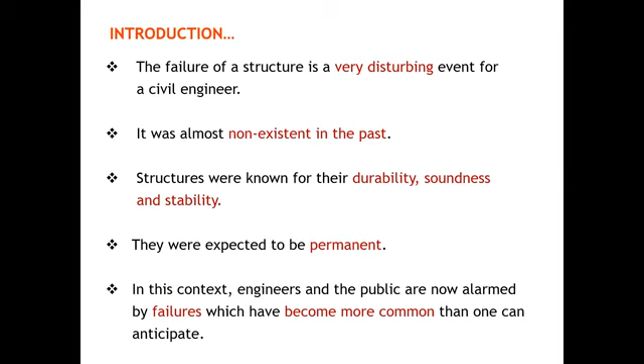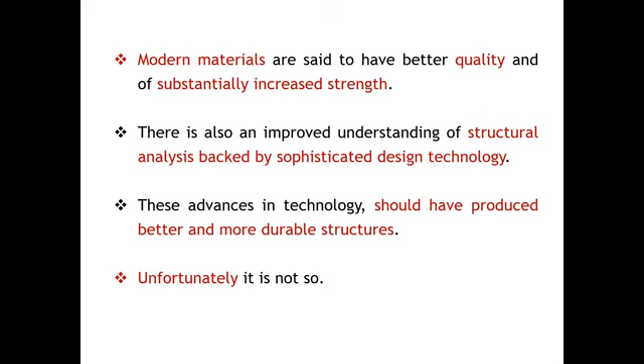But presently, what's happening is that failure of structures is becoming more common. Although we are using very modern materials with high quality standards and sustainability has increased, and we now have sophisticated analysis-backed design technology, despite all this we have issues and problems in structures which are already existing or even during construction time.

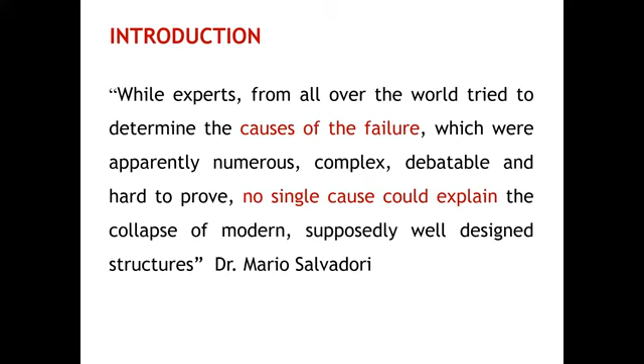So all these requirements make testing of concrete structures mandatory, and we have a number of codes, even our Indian standards, which make it clear that testing has to be practiced while the concreting is being done. All the PMCs are now depending upon these testing values before going ahead with further construction.

So while experts from all over the world try to determine the causes of failure, which are apparently numerous, complex, debatable, there is no single cause that could explain why this is happening.

So at every given point of time, it is better to have testing data with us to decide: are we maintaining the quality, are we addressing the durability, are we going as per the design calculations, the design drawing given by the designer, and things like that.

So there are types of disorders. It could be a functional disorder, or a structural disorder, or a minor disorder, chronic disorder, stabilized one, or progressive one. All that can be decided and addressed if we have data with us, and based on that we'll be able to construct durable structures.

So with this introduction - why we need testing parameters and testing details while construction is on, or the structure is already completed - this will allow us to make the structure more durable, and we'll be able to address what sort of issues are on, how to rectify it, and things like that.

When you get into investigation methods, normally visual observation is most important. Our engineering judgment is going to be very, very valuable, more so than any other testing methodology.

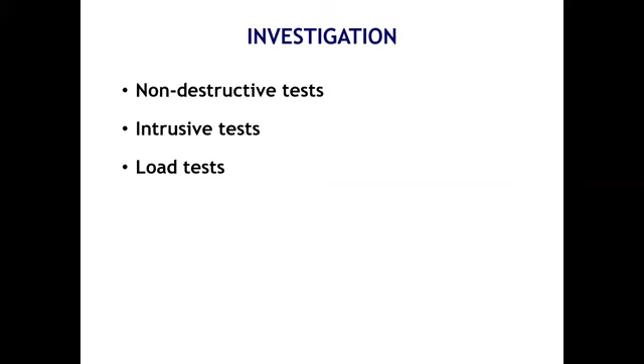When it comes to non-destructive testing, we can use a number of non-destructive testing methods, or go for destructive testing as mentioned earlier. In a few cases, we also go for load tests when we are not able to take a call using these two methods, for example precast structures done with mivan shuttering. The best thing is always to go for a load test to make sure nothing goes wrong.

Normally in India, they commonly adopt non-destructive testing as follows: rebound hammer and penetration technique, ultrasonic pulse velocity, core drilling test to evaluate the equivalent cube compressive strength of the concrete, carbonation test, half-cell potential test, evaluation of chloride and pH through concrete powder sample in terms of durability desired, and Profoscope survey for identifying the cover and the rebar which is already located.

As I said earlier, we don't even get GA drawings, so we don't have a structural drawing. When you want to assess additional load carrying capacity of a member, obviously you need to go for a profometer survey so that you get the approximate details of reinforcement available.

There are a few other tests, like core trepanning, for finding out the loss in pre-stress, but very limited knowledge and usage is available at present. As mentioned by our managing director, SERC is doing this technique, and they are able to predict the loss in pre-stress in the concrete.

The flat jack technique is extensively used for old masonry structures, whether stone masonry or brick masonry, when you want to know the carrying capacity. A flat jack is inserted between two brick or rock masonry mortar joints, and then later inflated, so the stress goes through it, and with a strain gauge you'll be able to get the stress being undergone at that particular point of the structure.

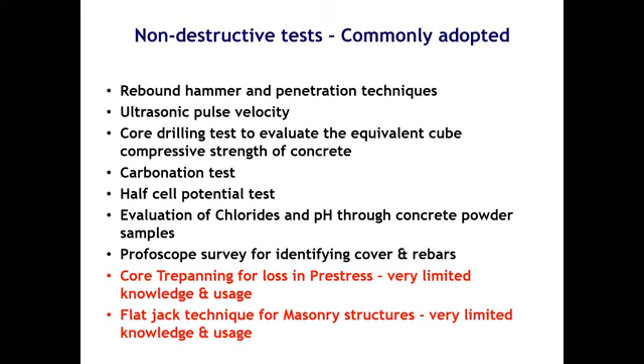Triplet tests are also there, but that's not exactly being extensively used in the industry. The non-popular non-destructive testings are also there.

Thermal methods are basically used in waterproofing lines, where we read the temperature to find out the moisture content. If the temperature is high, there is no moisture movement, so there is no leak or dampness. We can use it for those applications, but otherwise for interpretation in rehabilitation it is not possible.

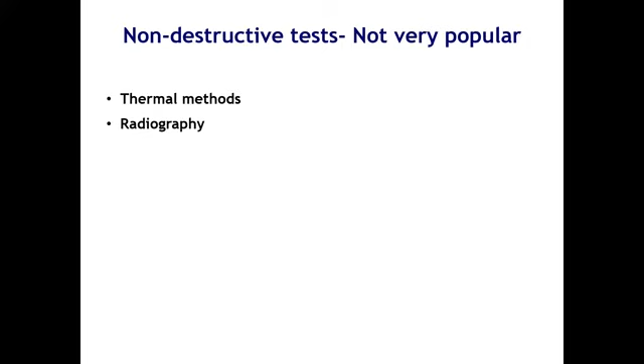Radiography is being used very limitedly; it is not extensively used. Stress wave propagation method and these above methods are not used, simply because there is a lack of physics knowledge on the part of structural engineers, and the limitation to work as a team with a consultant based on physics is going to be very low. Probably in research we'll be able to adopt all this, but on field we have limitations in using these methods.

Now coming to the popular method we've been using, the rebound hammer, which everyone might be using even as a final year student or PG student doing your project. It's a very common handheld device where you measure the hardness of the concrete with a spring-loaded mass inside the hammer. The rebound hammer gives you a rebound number; the higher the number, the harder the concrete surface, which is a qualitative test.

With this test, quantifying the FCK or grade of concrete is not advisable, because for example if concrete has carbonated, it should give a very high rebound number, but that doesn't mean the concrete has a very high FCK value. It may actually have a lower grade but still give a higher rebound number. So it cannot be taken as a quantitative test, only as a qualitative test.

The limitations: you need to have a proper preparation before you do the rebound hammer test, because the smoothness of the surface is very, very important, and it varies with the size and shape of aggregate. For example, I'm going to use a 40 millimeter aggregate.

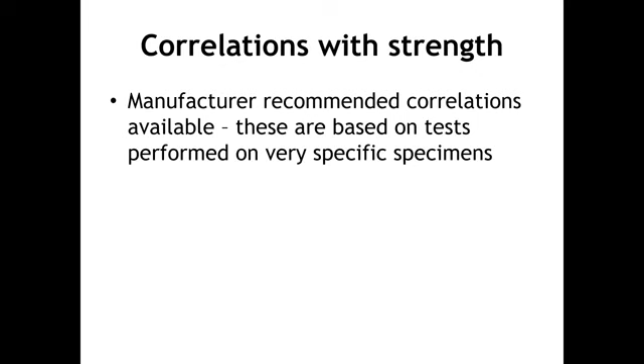As I said earlier, the carbonation of the surface produces a very random number, and that number will not be able to help decide at all. The manufacturer gives a graph where we'll be able to give a recommendation. But the thing is, it is only specific to that particular specimen, because our concrete grade and our concrete making system and type of concrete is totally different from the graph which has been related to that.

So we need to be very, very careful if you want to convert that. If you really want to do it, then you need to cast a number of cubes, do the rebound hammer test, and then take that data, and with that data you can probably predict it. Otherwise, it is not advisable to rely on this graph.

The second one we try to use is ultrasonic pulse velocity. Again, this is also a qualitative test. You can go with different technical equipment like Pundit 7 and Pundit 6. What you're trying to do is that one transducer is going to emit sound waves, and the other is going to receive the sound waves. We know the distance traveled, which is the member thickness, and we can calculate the velocity.

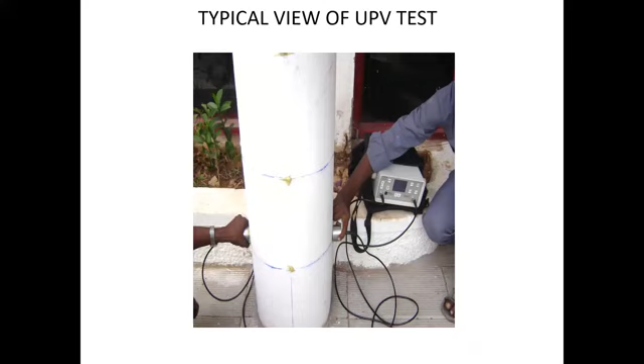Based on the velocity, provisions have been given. It was given in IS 13311 Part 1. Now it has been shifted to 516. The numbers are varying; we'll just look at it.

Now, what is more important here is the transducer frequency you choose matters a lot. Depending upon the path length, you need to go with the natural frequency. Lower the natural frequency, the higher the distance it can travel. So if the thickness of the member is more, you should always opt for a lesser natural frequency transducer, otherwise you may not get a proper reading.

So it is generally used to verify the homogeneity of the concrete, presence of voids, cracks, and loss of integrity. It's qualitative, as I said, and relative concrete conditions can be obtained.

The combination of rebound hammer and UPV helps us in identifying corrosion-prone locations. For example, as was well explained by the earlier speaker, if corrosion is going to take place, obviously expansive forces are introduced, and that pushes the cover concrete.

As it pushes the cover concrete, when I do a rebound hammer test in that particular location, some amount of energy gets dissipated because of the gap between the concrete and the rebar, and you get a lower number. Similarly, when you do the UPV test, as the gap exists between the rebar and the concrete, your UPV value is also going to be very low.

In other areas where the rebars are not there, if you get a better value, and where rebar is present you get a lower value along with a very low rebound number, we can infer that corrosion has already initiated.

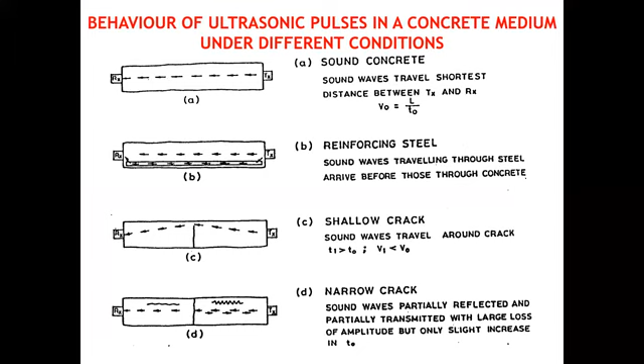If the concrete is sound, waves travel straight forward and we get the velocity. If you've got heavily congested rebar in the concrete, sound waves travel through the rebar and you get a much higher velocity, so you need to be very cautious about whether to take these values as representing the concrete velocity.

So you need to use a profoscope and make sure you are avoiding the maximum rebar location, so that you don't get a value which does not actually represent the quality of the concrete.

If it is a shallow crack, the waves will always travel through an alternative path, which takes a longer time, and then the velocity will get reduced.

If a crack is wide, obviously the whole signal will be reflected, and you will not get any signal at all. In the narrow crack case, you get an unstable reading, but here you will not get any readings at all.

If you've got voids and micro cracks, sound waves may not travel across them, and then you will get an unstable reading.

But what happens is, if the concrete is completely saturated with water, even though it has voids and micro cracks, you will still get a higher value because water is a conductive medium, and it may not be the right value at all.

So you need to check maybe once in the morning and once in the afternoon, and then compare the two. If the values are not varying, then you can take this as a valid reading.

The code gives you the spacing between the points. 300 millimeters center to center is a grid point we are supposed to have, and then take the reading.

If we normally use acoustic coupling, on that side we normally go with grease. Of course, the manufacturer also gives acoustic coupling gel, which is very expensive. Normally you can go with the grease.

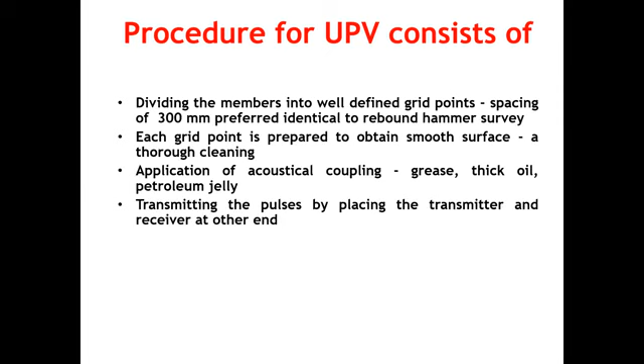The whole purpose is we don't want any gap or void between the concrete surface and the transducer, because however much grinding we do, the flatness will not be exact. So we need to use some gel, which could be a petroleum jelly, so that we make the contact proper, transmit the pulse, and the other probe receives it so we can calculate the velocity.

Once you calculate the velocity, it can be inferred using IS 13311 earlier. If it is above 4.5, the concrete quality is excellent, and between 3.5 to 4.5, it is good, and so on.

But now the code has been revised, and the earlier version did not talk about the grade of concrete. The present guideline says if your concrete is above M25 grade, and the velocity is more than 4.5 kilometers, then it is excellent. 3.75 to 4.5 is good. Below 3.75 is doubtful.

If you look at the earlier guideline, below 3 is only doubtful. If it is between 3 to 3.5, it is medium, and 3.5 to 4 was good.

Core test is another method where we get the exact FCK value of the concrete. For example, if you wanted to add one more floor, or upgrade the structure from seismic zone 2 to zone 3, the designer needs to know the reinforcement detailing and also the core, so we need the FCK value. For that, the best method is the core.

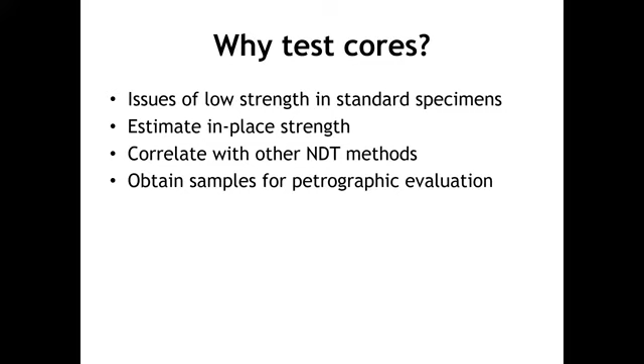Sometimes you use this for doing petrographic evaluation, because now you get aggregates which are more reactive. We need to be very careful, otherwise we'll have alkali aggregate reaction issues. It also helps estimate the general and internal condition of the concrete, and get information about the carbonation depth, density, and so on. For those, we use this method.

Now coming to number of tests, how many cores we need to extract depends upon the objective. Suppose you wanted to quantify the strength of the concrete, or there are cube issues, then you need at least a minimum of 3 cores so you can take the average and derive what is going to be the FCK value of the concrete.

If it's for in-place strength, take as many as possible, depending on which members we are going to address, and based on that we decide the number. This is the system followed.

Normally the core is extracted with a diamond fitted wheel, and the minimum diameter of the core should be 94 millimeter, or 2 times the maximum size of the aggregate. But in the field, 69 mm is what's used by us and many other consulting companies. The reason is the rebar spacing normally comes to about 75 millimeter maximum, so with a 94 millimeter core we won't be able to avoid cutting the reinforcement. So we go for 69 millimeter.

The L by D ratio of 2 is preferred; it can be between 1.9 to 2.1. In case it's not possible, for example if the slab thickness itself is only 100 or 120 millimeter and I'm using a 69 millimeter diameter core, I won't get the L by D ratio of 2, but you can use the correction factor given in IS 516. As per IS 516 or ASTM C39, L by D should be 2, and cores with embedded reinforcement should be avoided as much as possible.

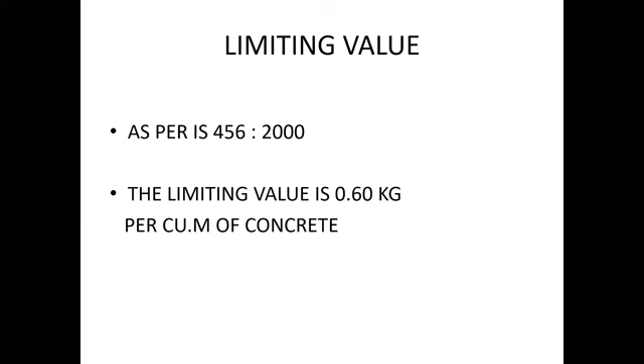As per IS 456, up to 0.6 kg per cubic meter is allowable, not an issue. That was also well explained by Professor - why some amount of initial chloride ion value need not be alarming to the concrete. When it goes beyond that, then you have issues with the chloride.

If your pH value is greater than 11.5 and you've got very low chloride content, then your structure is not expected to corrode fast. If the pH value is very high, but your chloride content is also very high, then obviously the structure is expected to corrode. Low pH value, which is acidic in nature, with low chloride content - still, although the chloride content is low, your pH value is also equally low, so obviously the concrete will corrode. And low pH with high chloride, nevertheless, we don't have to say anything - obviously the structure is bound to corrode.

The other test we use is the profometer survey. Normally we use it for locating the rebar. Sometimes where you want to take a core for pipelines or AC lines and things like that, we use it to avoid cutting the rebar, and to find out the diameter of the rebar we use this. And also to find what is the depth of the cover at that particular region, we need to use this cover meter survey. So this is how it looks like.

There are two types: one is a profometer where you get a scanner separately, and the other is a profoscope where the profometer and scanner come together, where you will be able to find out the diameter of the bar, which works on a non-destructive pulse induction principle. It is insensitive to external interferences, and is used to check the cover thickness, rebar position, and diameter of the bar. In this particular case, you find 75, which shows the cover thickness of the particular member.

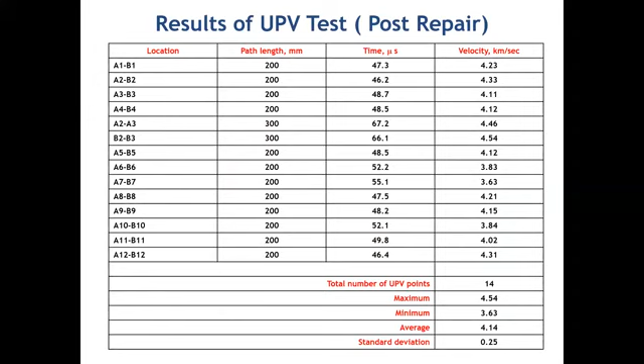So the repair was done in 2005, and SCRC completed the post-repair investigations in 2006. The investigation demonstrated that the repair methodology as well as execution adopted was perfect. The UPV values are very good, and all 3 units were put into use in the year 2006. Until today, it is functioning absolutely fine, no problem. This is a rehabilitated pedestal, and these are all the UPV values that have been done. If you look at it, the maximum was 4.54, and average was 4.14, and then it was certified for usage, and it went on well.

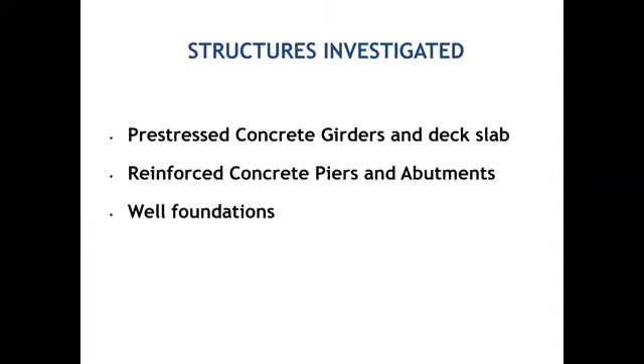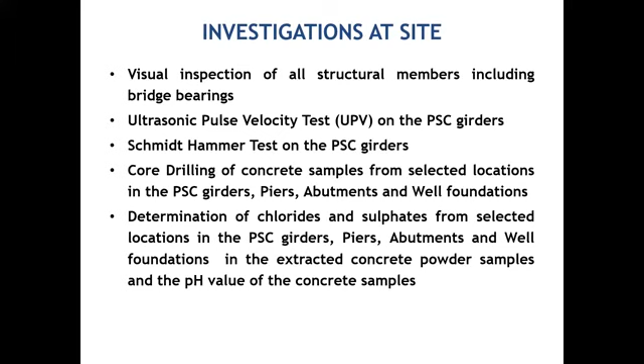So condition assessment of the bridge - this bridge was washed off during a flood, and then they had other related issues. It's a pre-stressed concrete girder and deck slab, with reinforced concrete piers and abutment. A well foundation was adopted in that. Visual inspection was done, including the bridge bearing, ultrasonic pulse velocity, rebound hammer, core extraction, and determination of chlorides and sulfates.

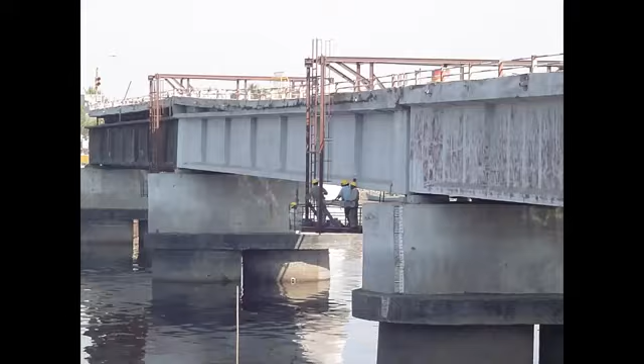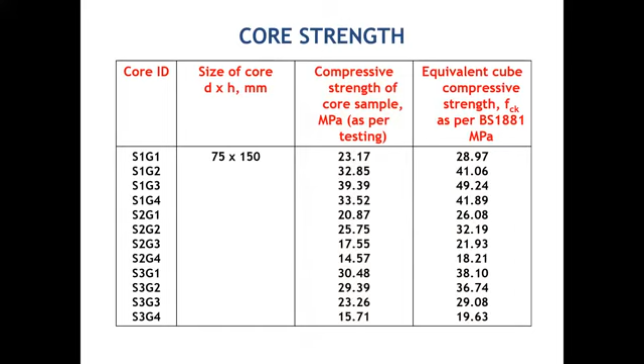Since it is a pre-stressed concrete girder, regular core extraction cannot be done. So a special system was adopted by SCRC to find out the loss in pre-stress. This is how the testing was done. Core trepanning method was adopted by SCRC to find out the loss in pre-stress, because we cannot go for straightforward core extraction there. Based on that, they analyzed the loss in pre-stress.

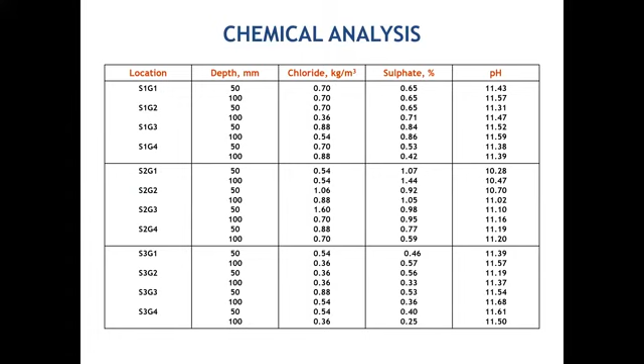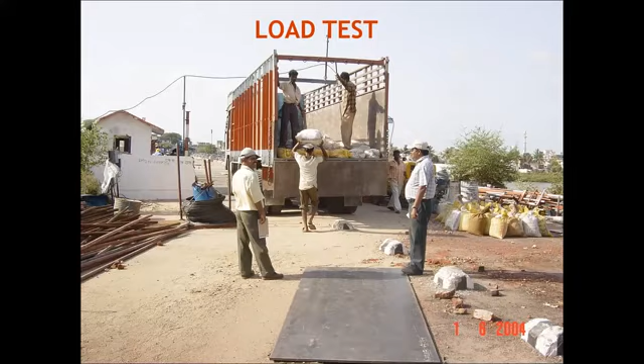Chemical analysis was done for chloride and sulfate. Chloride was found a little higher than the threshold limits in a few locations, while other locations were well within the limit. So finally, since it is a pre-stressed bridge, external pre-stressing was adopted as the rehabilitation methodology. Later, load testing was done, and it was certified for putting into use.

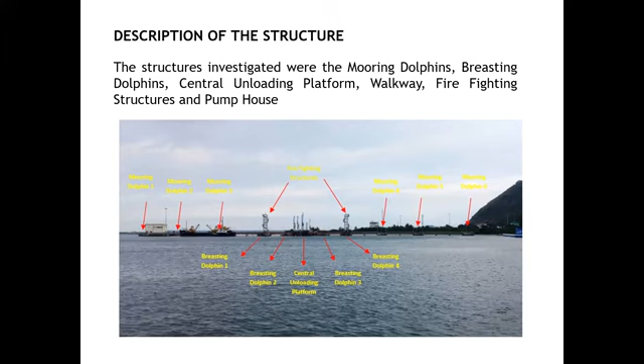The other case study is a condition assessment of concrete and RC structural elements of an LPG berth and outer harbor port trust. In a harbor you get a number of structures: mooring dolphins, firefighting structures, central unloading platforms, breasting structures, and a number of other structures. But if you look at all these structures, almost all of them will have a similar issue, where corrosion is going to be the major issue.

A number of times we come across the issue of how many structures have to be assessed. Suppose I have a particular structure, how many points do I need to do rebound hammer testing, how many cores do I need to take - these sort of things. For example, in a marine structure, core testing is not that important, because we know durability is going to be an issue. So we always opt more for half-cell potential, UPV, and then chloride and pH value, which are going to predominantly decide your repair methodology.

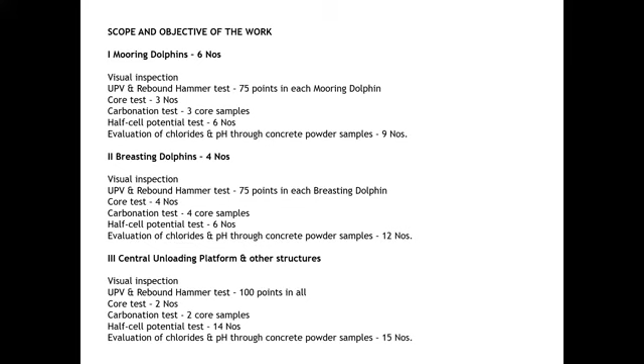So for the different structures, you decide the numbers, and then you go for visual observation, checking whether spalling has already taken place or only cracking has occurred.

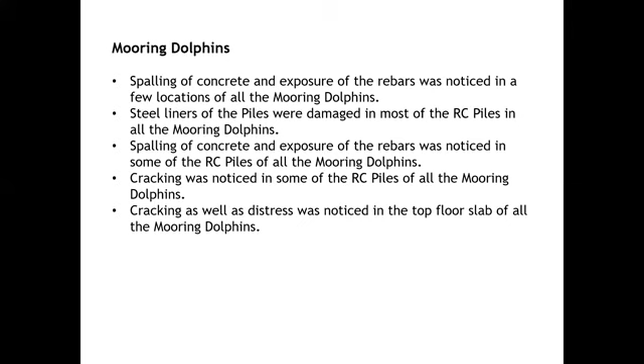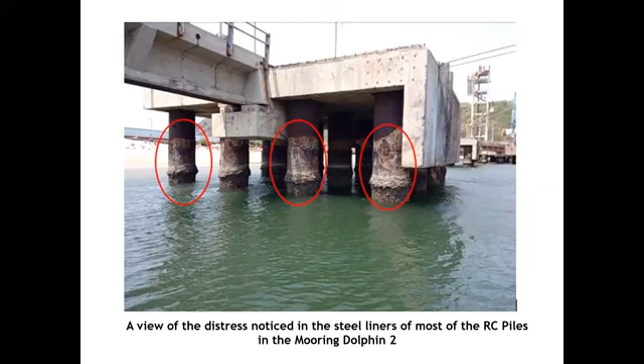Suppose you have a steel liner - what was its original thickness, and what is the thickness now? Should we maintain the same steel liner, or can we remove it completely and redo it? For example, now the stirrups are visible - this is the condition of the steel liner. You can find the steel liner is completely gone, and even the stirrups are visible from outside. And you will get cracks on the top deck of the slab.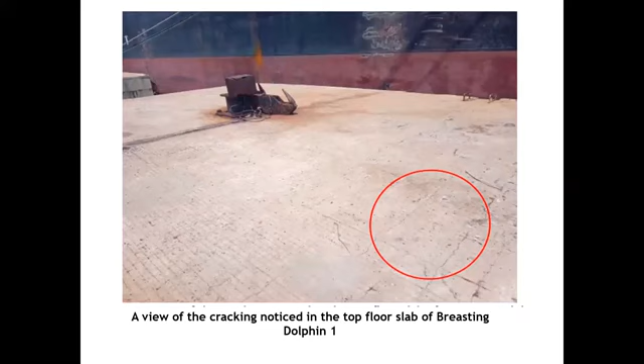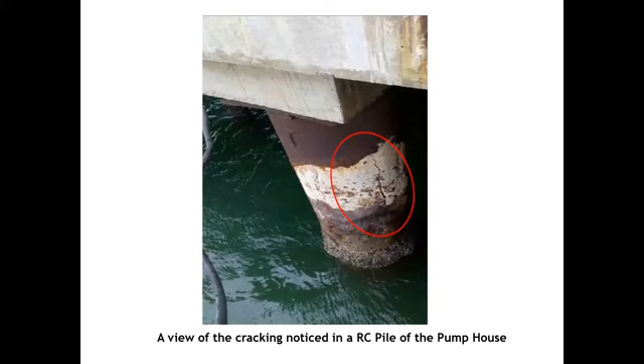On the central loading platform, these are all the visual observations we have been noticing. What's more important is that your visual observation is very, very important. Otherwise, it's going to be very difficult to infer these values with the data you get. This is a typical view you get in any marine structure.

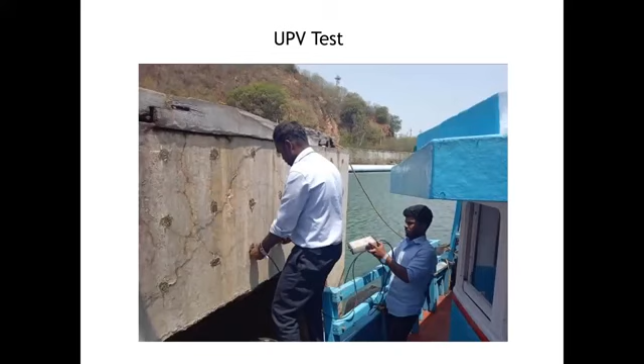What we do is the rebound hammer test, and ultrasonic pulse velocity testing, extract the core, and then do half-cell potential testing, which is very, very important as far as marine structures are concerned. Then powder sample collection, which is done at the lab, and then come to a conclusion on what you are going to design.

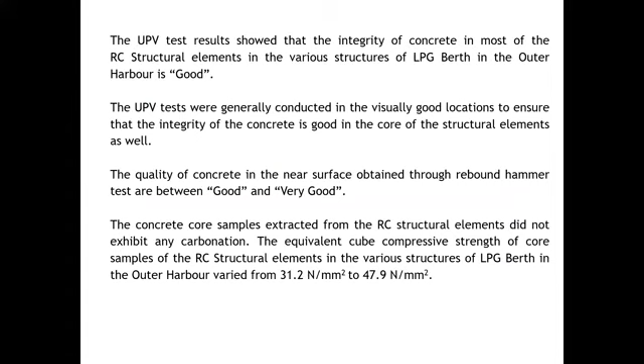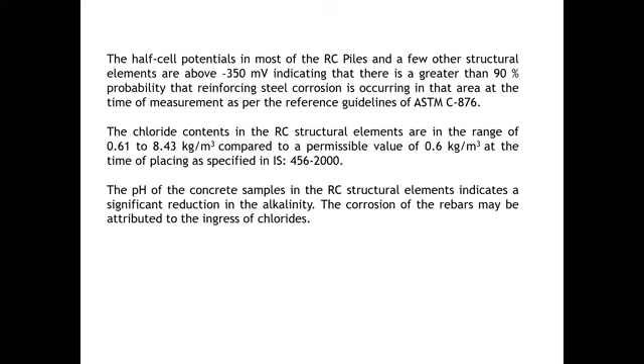Now UPV is good, and the quality of concrete near the surface is good to very good with the rebound hammer, and you also extract cores where you get values of 31 to 47 or 48 MPa. But if you look at your half-cell potential readings, which are almost minus 350 everywhere, and your chloride content, which ranges from 0.61 kg to 8.43 kg as maximum, you are going to have corrosion.

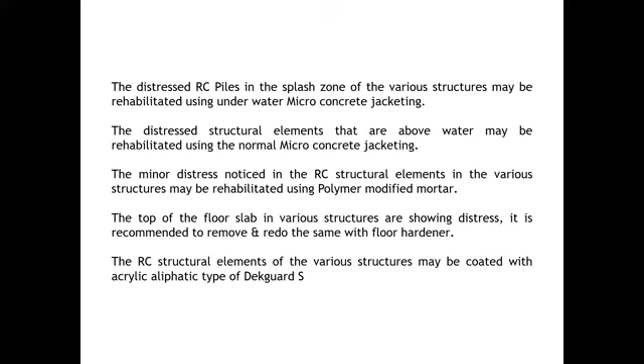Based on this, you give your repair methodology - whether you are going to have only repair and rehabilitation, repair and strengthening, or rehabilitation as well. We need one basic classification: if your repair methodology addresses durability also, then you can call it rehabilitation. Otherwise, you can call it repair, retrofitting, or strengthening. So that's how it is done.

Do the pre-survey of half-cell potential and UPV, do surface preparation, provide shear connectors, additional reinforcement, provide formwork, and provide galvanic anodes. As the professor already said, a number of methods are available, but the industry presently finds galvanic methods very handy, because one of the biggest advantages here is that not only is addressing the corrosion easy, but monitoring the corrosion levels is much easier too.

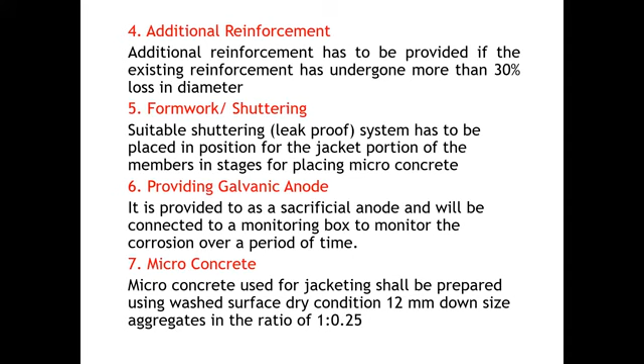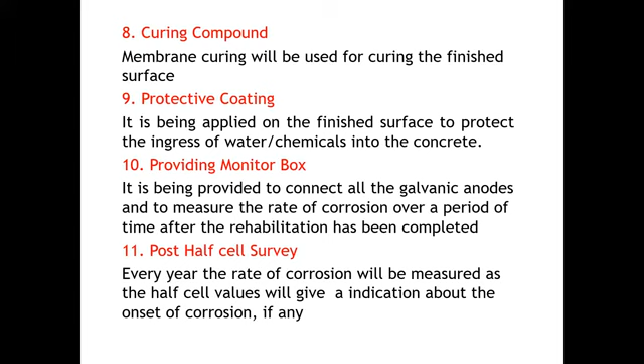If time permits, I'll show one case study; otherwise I'll skip that and go with the micro concreting, done with protective curing compound and protective coating. If you want to address durability, then you give a protective coating; otherwise you can leave it as such. If you're going to use a corrosion protection system with anodes, then go with a monitoring box also, so that you'll be able to monitor it. Based on that, you can provide the bill of quantities and estimate it.

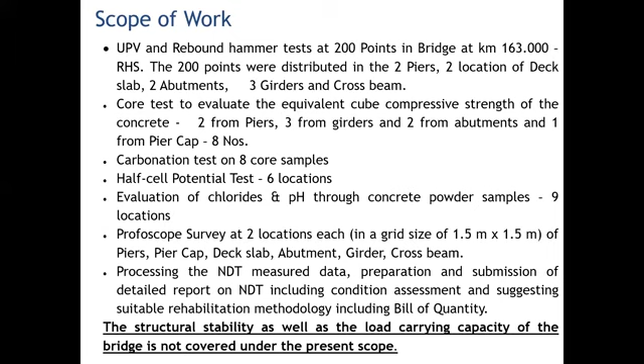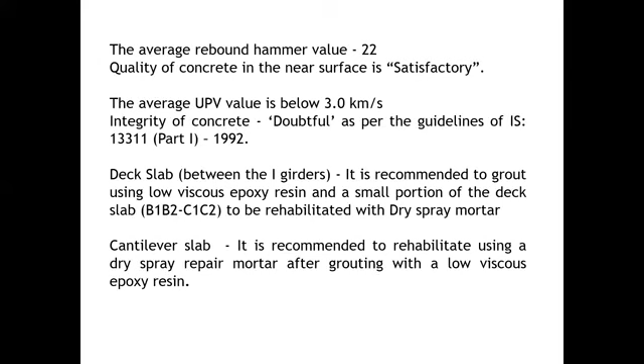Based on that, you decide how many points you are going to do, and then take out the values. Based on those values, you are going to give a repair methodology, and then finish off your estimation too.

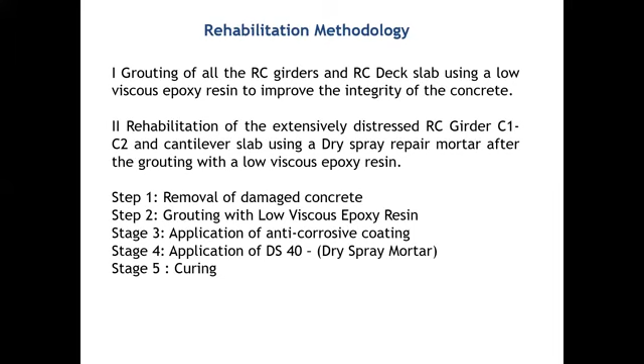This repair methodology adopted for this particular bridge structure: remove the damaged concrete, grout with low viscous epoxy resin, then application of anti-corrosive coating and application of DS40 dry spray mortar, because the bridge will not be able to go with regular micro concrete jacketing, and then curing is done.

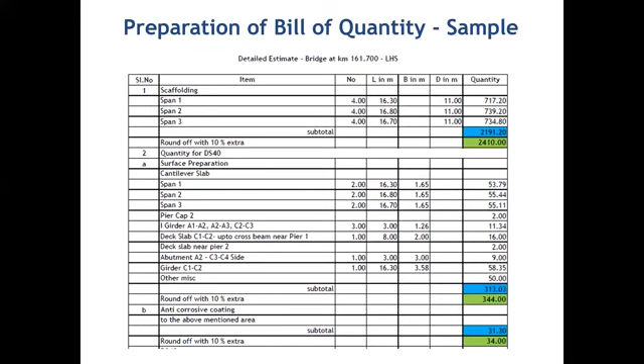For a minor one, you can as well go with either dry spray mortar, or you can go with polymer modified mortar, then finish off your bill of quantity.

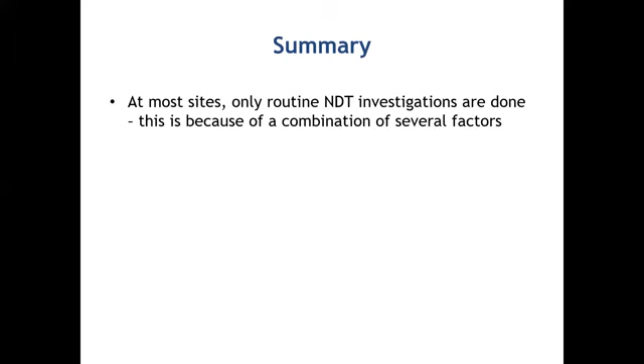At most sites, only routine NDT is done, because a combination of several factors are to be taken into account. The limitation of test and equipment are also there.

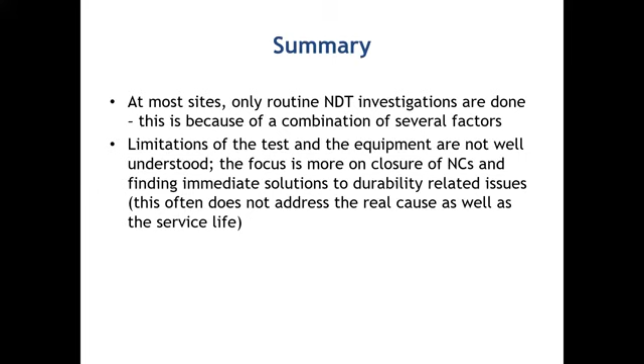Experience has shown that utilizing some advanced technique, until you fully understand the physics of it, whatever we are trying to infer may not be as good.

So these members can be tested with non-destructive testing, and you get a number, and these numbers have to be decided based on your engineering judgment. A single NDT test will not be able to give you the right solution, so you have to go with a combination of different non-destructive testing to come to a conclusion on what needs to be addressed and how we are going to do a repair methodology.

With this, I just conclude my presentation on NDT.

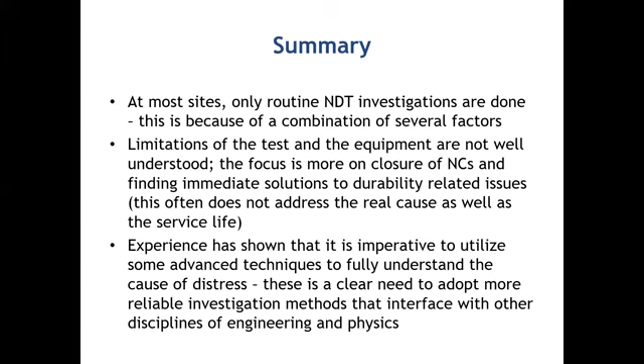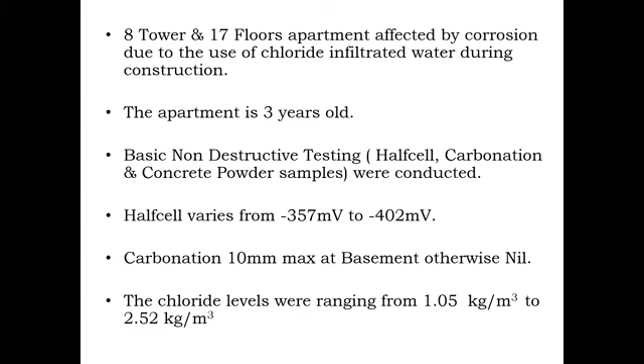So the whole core concrete has got chloride content, where you will not be able to remove the chloride-contaminated concrete and go with a new one. So the best thing is to go only with a sacrificial anode system.

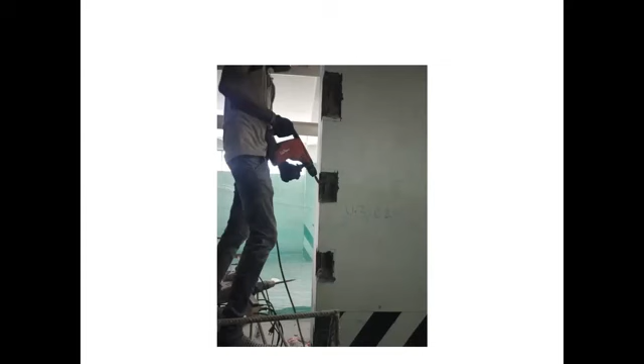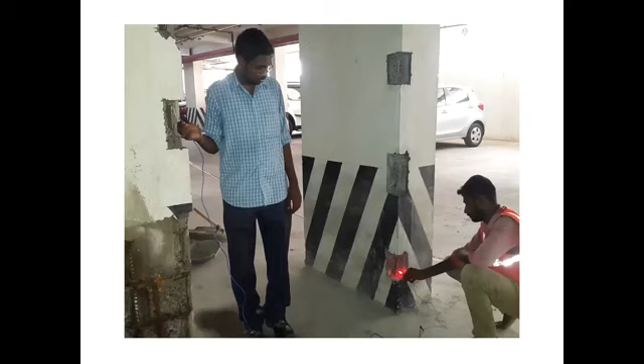So what you do is you run the profoscope, check where the main rebar is, chip off, then space these anodes, tie these anodes, and check the connectivity between the anode and the rebar. The connectivity must be very, very essential - otherwise these anodes will not function. For all given purposes, the connectivity to the rebars must be there, because otherwise the current flow will not take place.

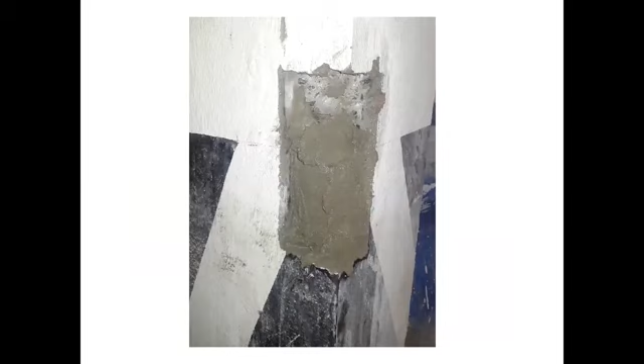In this particular case, you can find one of the columns where the anode has been installed, and the connectivity between the rod and the anode - the other column has been tested as well. You can calculate the spacing based on the steel density ratio, as explained by Professor Raji sir already, and then monitor this too.

In this particular case, we don't have to go for any test like the profometer survey, or core cutting, or UPV. Nothing is required - it is very clear. The water which has been used contained chloride.

So all we want to do is check what is the chloride content in the concrete at present, whether within the permissible limit or not, and second, what is the depth of the chloride ions. When you keep drilling more and more, it's found that the entire concrete has got chloride, so it is not possible to remove it - you have to go only for a system like this.

To arrive at this sort of repair methodology, NDT tests are very, very useful. With this, I thank you.